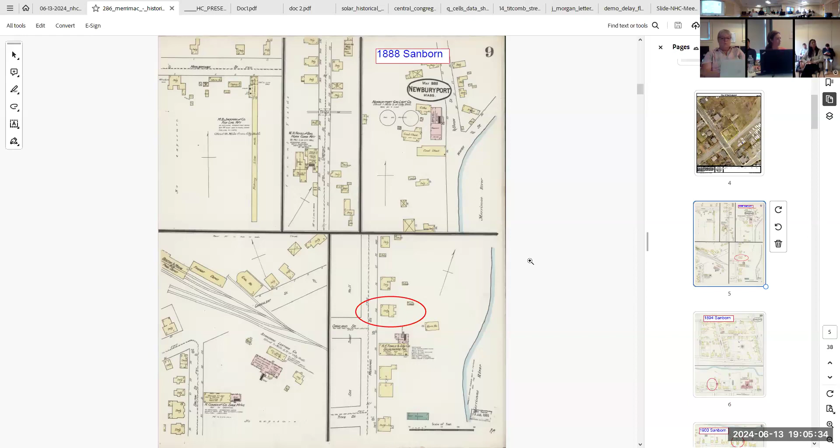Next slide please. This is the 1888 Sanborn map, and over these next slides you're going to see the rear addition change shape in various maps. You'll see the house at the bottom circled - it's got kind of two additions on the back.

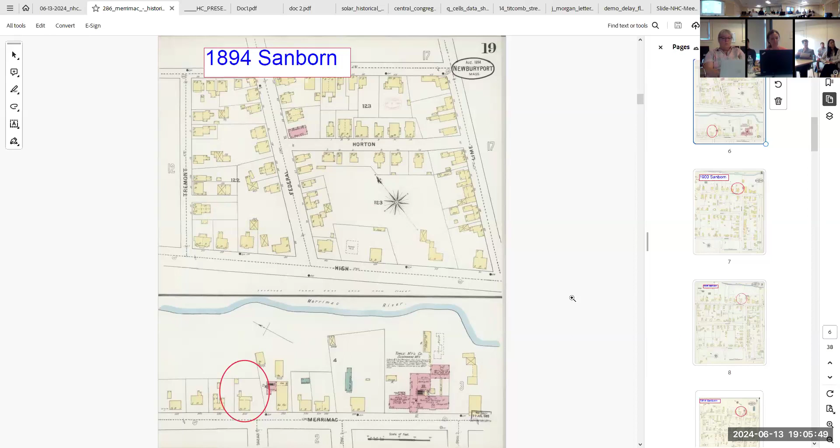Next slide please. In the 1894 Sanborn map, you can see at the bottom, it's circled, and now the two additions - there's still the shed roof, single story addition, but it's got like one doghouse addition in the back.

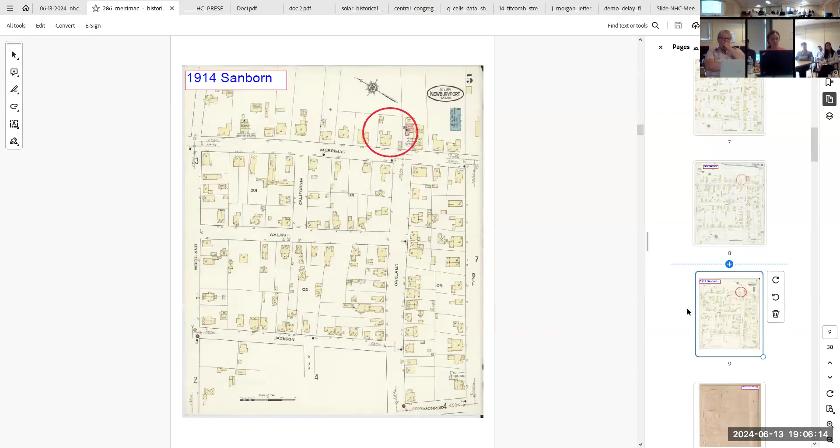Next slide please. In 1900, we're back to having two entrances in that one story addition. In 1906, it looks pretty much like it did in the prior Sanborn. Next slide, in 1914 it still continues to be the same. Next slide, and this is the 1924 Assessors map - it's back to one on the bottom.

So I think these - and we'll explain this - Lisa O'Donnell, the structural engineer, will explain in her notes. These clearly were added haphazardly. You can tell by the construction of the photos. So whether it shifted back and forth, or people took them off and added new ones, it's clear there's been changes throughout the years on those back additions.

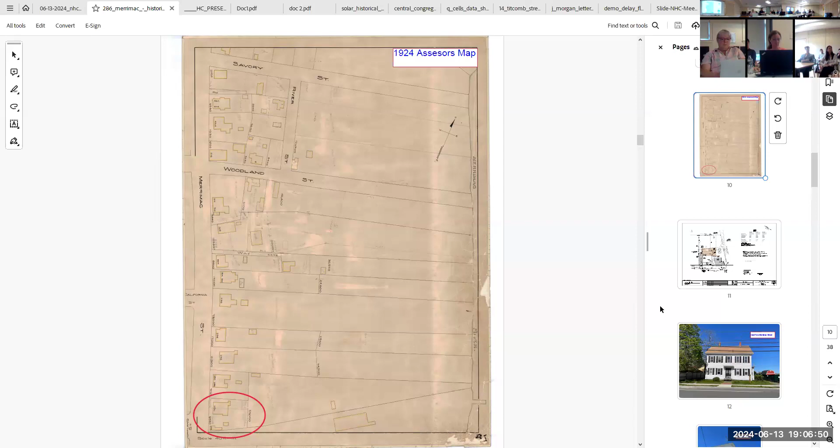Next slide please. And here's our site plan. So what you can tell - can you blow that up a little bit, Caitlin?

So the peach is our proposed addition. The existing one-story addition off the back, you can see the larger rectangle that goes across the back and wraps around the corner. We propose to remove that. And then you can see what we refer to as the doghouse additions on the back that we propose to remove as well.

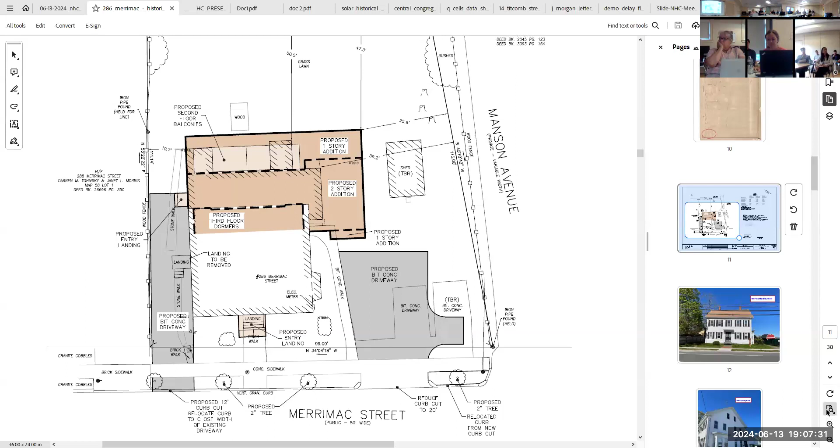Many of you were on the commission when Joel was here for the approval of his Washington Street project, which was similarly clad with all that stuff covered. If you've been by the Washington Street project, you see how nice it looks because the details have all come back out again. So a similar restoration is proposed for the main box of this house.

Next slide, please. So as I said, and what we proposed in our application, Lisa O'Donnell, the structural engineer, has looked at this. She has determined the three additions to the rear of the structure, in the fourth addition's foundation, the larger addition that runs the length and width of the structure has loose bricks and is missing mortar. The framing of the larger addition was poorly built and is in poor condition, with the frame walls sitting very close to the grade.

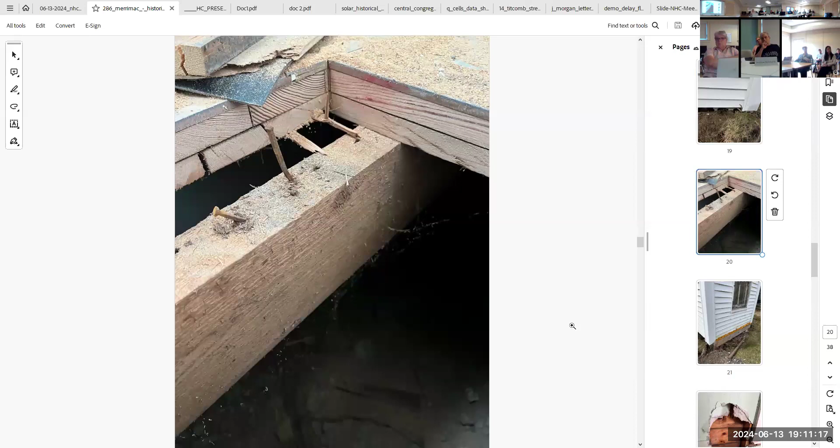Next slide, please. So here's just to show how close it is to the grade, but there's one of our cement blocks holding up that corner of the addition. Next slide. And this is just a cutaway to show that some of this is new construction anyway. Eileen, do you have anything to add to this particular slide?

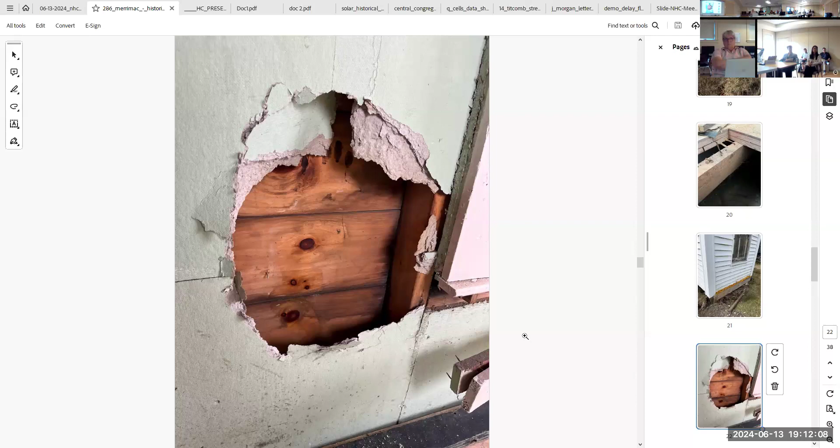Nothing other than it's pretty thin in frame, I imagine too, so really just trying to bring that up to meet code as well would be part of it.

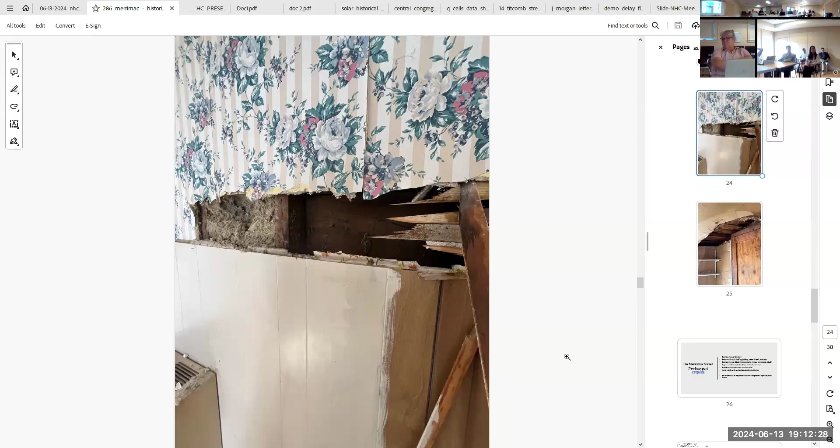Next slide, please. That's just a further view to show the construction of the building itself. Next slide, please. And the insufficient construction of the walls, and as I said, the insufficient lumber sizes. Next slide, please. And again, into the roof, and you can see how it was kind of patched.

When was this built, the additions? Well, we don't know exactly. It's old, certainly old, because it shows up on some of the 1900 plans, that addition. But the dog houses attached to it have changed over time. And even the addition appears to have been patched - you can see from the existing additions how that shed dormer is at an angle, and then it's got the house that kind of wraps around the edge. So it's kind of patched on.

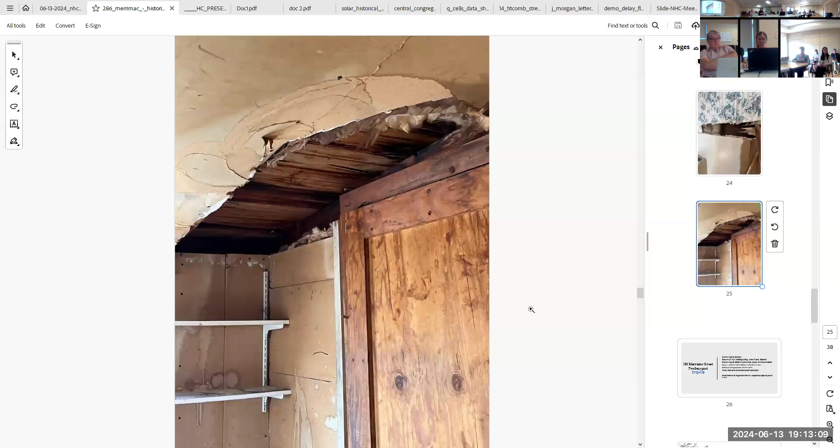Next slide, please. So the proposal, as I indicated, is to improve the current form of the structure, and to remove all vinyl cladding, the siding, corner boards, shutters, remove the original detail - restore the original detail, corner boards, expose the eave fascia details, improve the awkward shed additions on the south elevation, install period-appropriate window styles, cedar clapboards, and architectural roof shingles. And detail it in to restore the original structure to complement the adjacent period houses.

So with that, I'm going to turn it over to Eileen to describe the work that we propose. Thank you, Lisa. So actually, this...

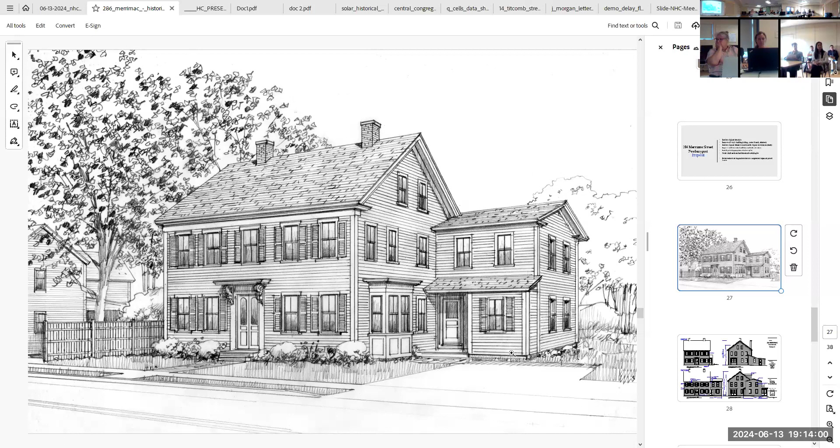This is to expand on the addition and start giving hints to where we're headed with this proposal and proposed design. But if I could just pass over that one and go to the next slide, please, just to compare existing with proposed.

So I think I'll start by talking about the changes as they relate to change in mass and form, and then I'll go back and talk about the changes in materials. So starting at the top left, the top two pictures are existing and the bottom two are proposed.

If we start with the front elevation, you can see on the bottom left drawing our addition. We have a two-story addition being proposed where you saw that sort of awkwardly shaped shed roof, one story wrapping the corner. That is the location which we're replacing with the two-story. The bottom right shows it as a side profile.

This is the elevation that faces downtown. What we're showing here is that we're proposing to come in with the two-story addition with a shallower pitch. What's important to note is that we still are trying to maintain that sort of subordinate position it has in plan by keeping it to the back of the original structure.

So if you were to compare the front elevation of the historic structure to the two-story addition that's proposed, it's set back about 22 feet from that building, from the front facade - trying to control and be respectful of the historic structure by bringing down the scale in both form and location.

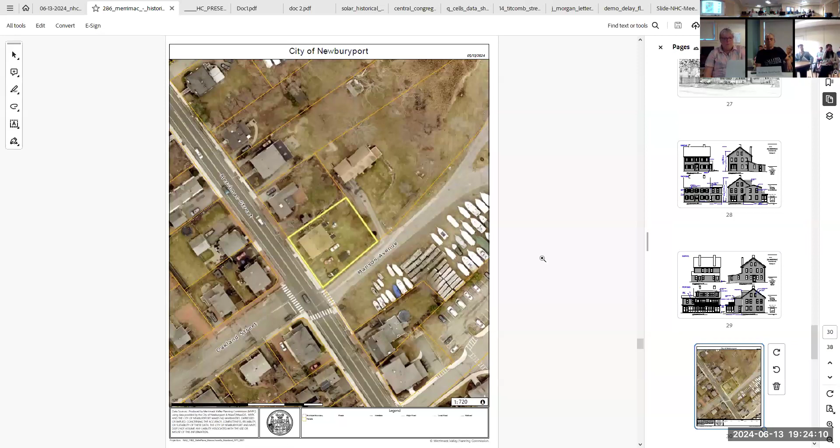Next slide, please. This is looking east on Merrimac Street, across the Mason Way to the house next door. Next slide, please. And this is looking to the rear, so you can see what's behind us. There's a small barn behind this, but it's not in this photo, it's directly behind it. Next slide, please. But here we go.

Next slide, please. This is on 253 Merrimac Street, further down. And see the dormers added there. Again, 251 and 253, so this would be to the east on the opposite side—excuse me, to the west on the opposite side.

Next, please. And 288 Merrimac, this is to the west of the property. Just from my recollection, if I'm correct, the driveway is to the right of the house, the face of the house. Right? That's correct, yep, actually. Yeah, that stays.

Well, we're proposing to actually minimize it. So it provides the parking for both units right now. We'd like to actually separate it. We're proposing a single lane drive or curb cut to the left of the building, and then take the existing curb cut and narrow it up, pulling it away from them. It's kind of a no man's land, everybody's just very wide, and people just park things all over the place in there, so I'm trying to control that and push it together.

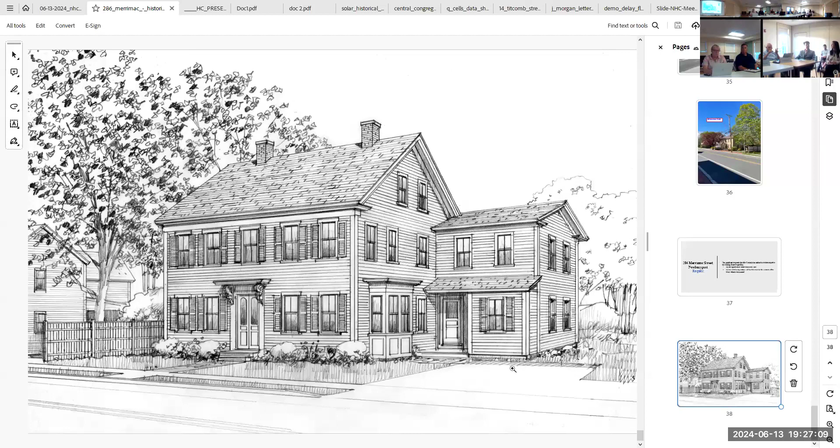Yes, I'm currently going to go to the existing plans, existing elevation. Thank you, Caitlin. So there is that primary door, the center door, and that actually—

The Zoom meeting audio seems to cut out, like just right now. I don't know if you can hear me, but...

Two-family access to the structure. So similarly, we're still going to have access to both units primarily from that front door. So internal...

It did it again. Caitlin, can you hear me? Because the audio keeps cutting out, especially it seems when Eileen is the unlucky one—her audio, when she's speaking, will just disappear to nothing.

There it is. So in the top right drawing, that's a secondary door to the left unit. And we would just, as you see on the bottom right, slide that door down. So that's, to Mark's question, you know...

Beneficiary from a usability perspective—does the proposal benefit both units equally or one unit? That was my question, yes, I'm just curious. You mean the size of the units? Well, usability, you know, when you make this change—the usability of it, is it equal between the two units, or does it favor one unit or the other? Our goal was to make them as close to equal as possible.

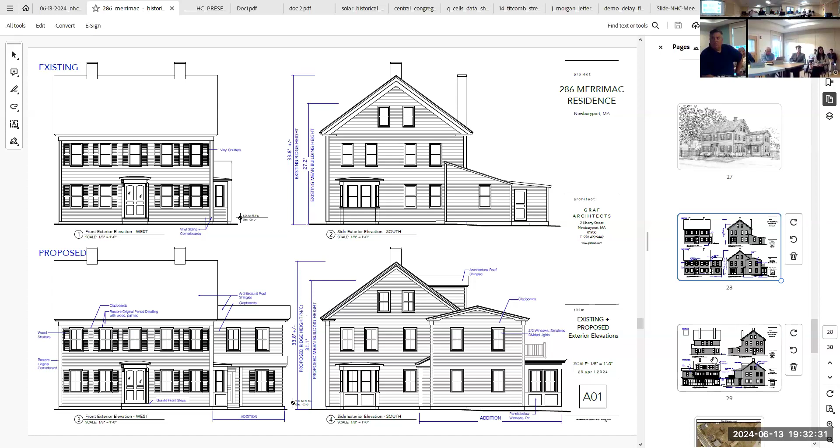You cut out a little bit there, but I think we got most of it. We need a little more detail on the way the extension on the back is going to be decorated. I see these sort of rectangles below the windows. If we could see the back elevation, what do you propose in terms of materials and decoration on that ground floor, below the windows?

Yes, so the idea there was, similar to the traditional bay that has panels below, we have that wrapping around the small section of this 10-foot addition of the one-story we're looking at. The goal was to make that—and granted, it's longer than a traditional sunroom than you'd expect to see—but as an effort to distinguish between the main bulk and body of the architecture, this area will all be paneled. There's no shingle or clapboard there; it's all trim work with a nice detail paneling system below.

This would be... not plastic, not metal. Sometimes, when you get closer to the ground, it might be more appropriate to use something like Azek—there's also Boral, but I was thinking of this one, Azek, thank you. The panels will be in the middle and just take paint.

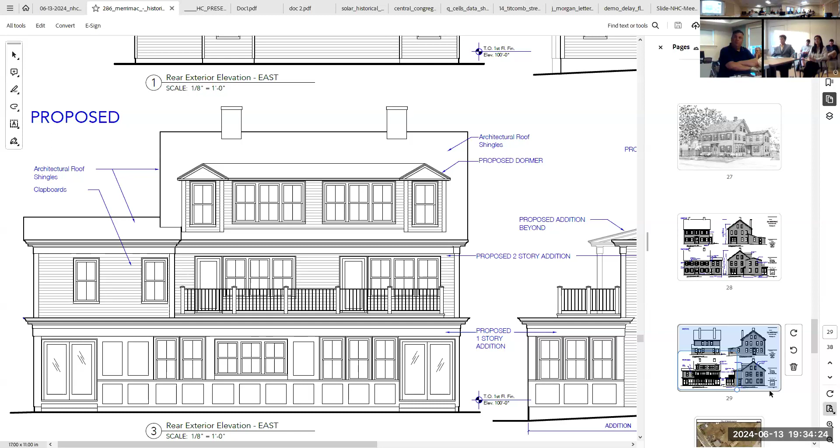Okay, any other comments? Questions? I guess a motion to approve—I guess I'll be writing this up. Does anyone want to make a motion? I make a motion to approve. Second plan, I'll second the motion. All right, we'll go around and see if everybody can hear us, voting on approving the write-up of the recommendation of the DCOD.

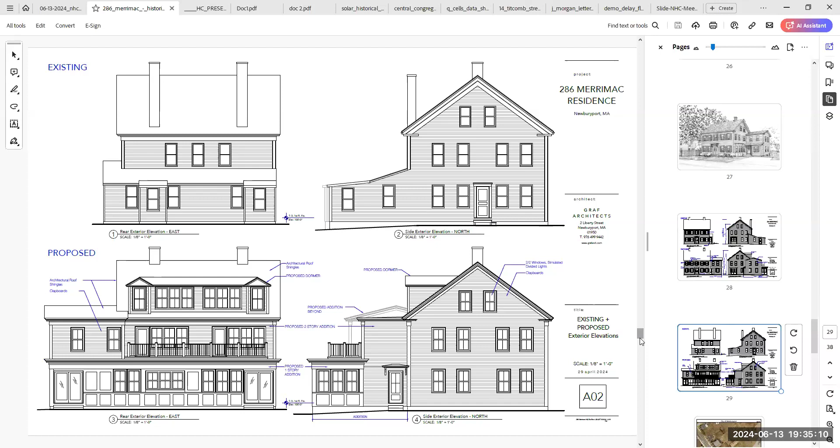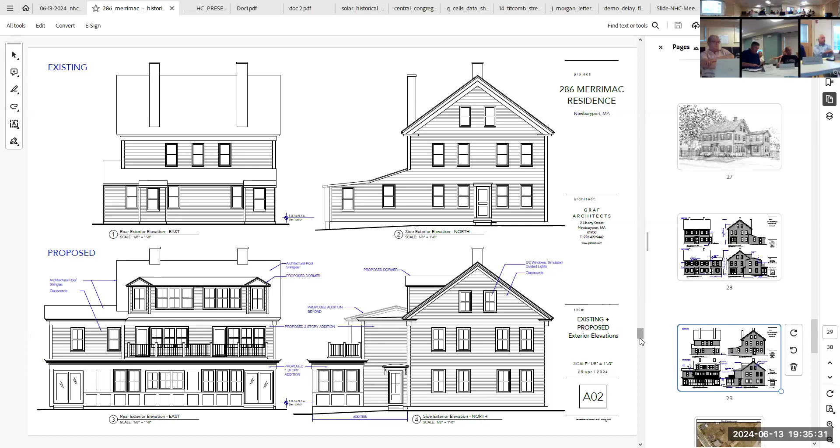We'll start with Glenn. Glenn, can you hear us? Your vote? Yep, I can hear you, and yeah, I'm a yes vote. Biff, I might have some materials that you can use to assist with that, templates and what have you, to make that job a little easier. Great, thank you. Myself, I'll vote in the affirmative. Mark Sindrome, yes. Andrew Bernhardt, yes. Ed Neumer, yes. Alan Markey, yes. Thank you. All right, it appears unanimous, and I'll be writing that up soon. Thank you very much. Thank you.

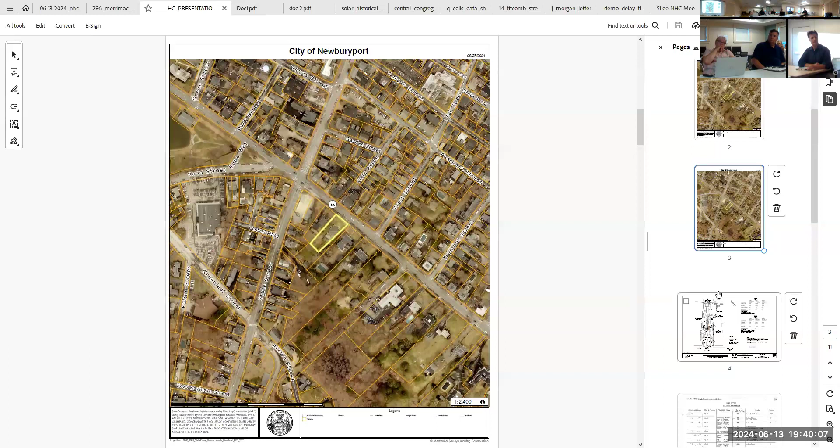On the left, the 89 section is existing, and the hatched section to the right on 91 is a mudroom and a screen porch. To the left, there's a hatched portion which is a mudroom. The mudroom on the left is about 11.5 by 8 feet. On the right, the screen porch is about 11.5 wide by 7 or 8, plus a screen porch which extends another 18 feet out toward the garden in the back.

For anyone who was on the garden tour this past weekend, this house was on the garden tour, and there's a beautiful garden which I'll get into in the back. You can see the proposed infill or addition is 3 feet more, taking the screen porch, redoing it, and pushing it about 3 feet back toward the property line.

Between the two structures, they're proposing to fill that in with a new building, and you'll see that when we get into the architecturals.

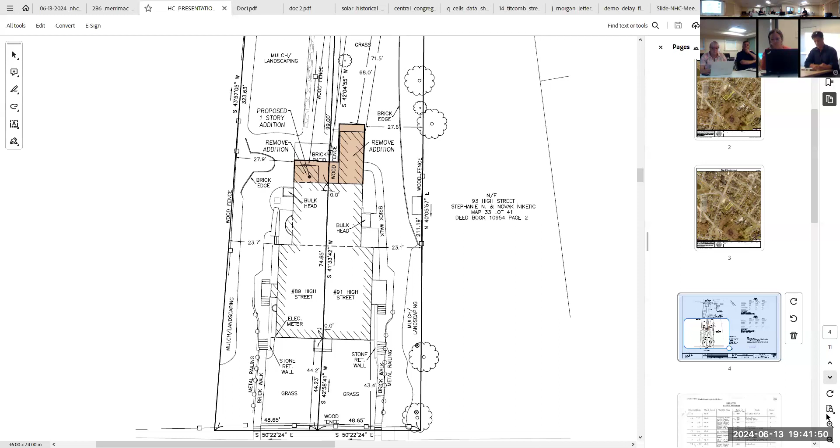Very quickly, next slide please. This is listed in the district data sheet as a Federalist from 1810, the Moulton House, and there's a nice write-up on the Moulton House which I'd be happy to go through if you haven't read it yet.

The next slide please, I'll just read very quickly. The historic name is the Joseph Moulton House, 1810, Federal style. Architectural significance: it's an excellent example of a square house built along High Street during the early years of the 19th century. This house has a 3-story hipped roof form typical of the style.

The modillion cornice is exceptional, as is the entrance portico, which is original. The portico is supported by fluted Corinthian columns, and the door itself is flanked by painted Doric pilasters. The small square windows of the 3rd story are typical of the federal homes built by Newburyport's mercantile class. So obviously, one of the great federals here in Newburyport.

None of our project touches the front or the next two-story piece. It's only the back where we're proposing to make some changes.

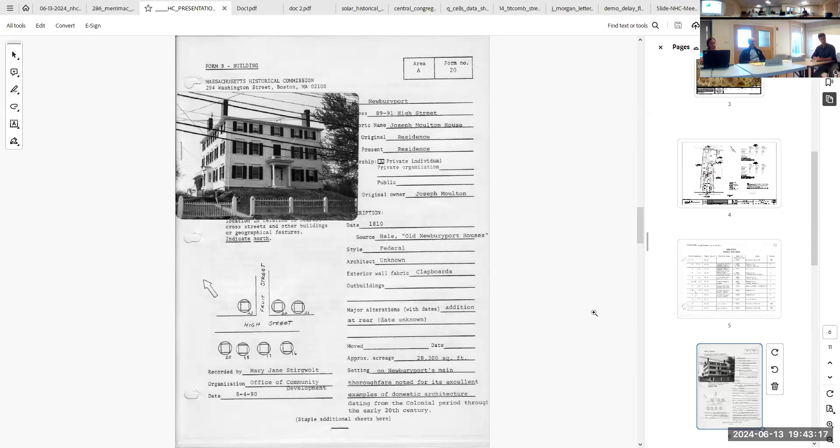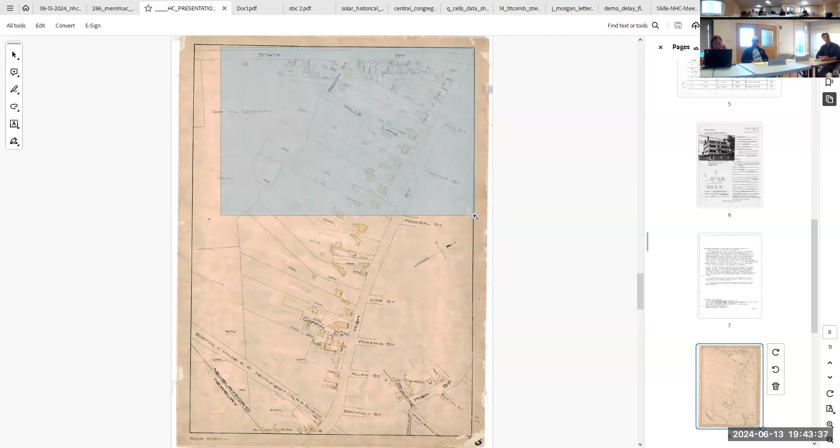Very quickly, from the 1924 map, if you can zoom in on 89-91 toward the top right, you can see it up there. The house in 1924 had what appears to be two mudrooms. There's one to the left, which we see today. The other one had no screen porch at that time, so that must have been added after 1924. But the two smaller one-story mudrooms did exist at that time.

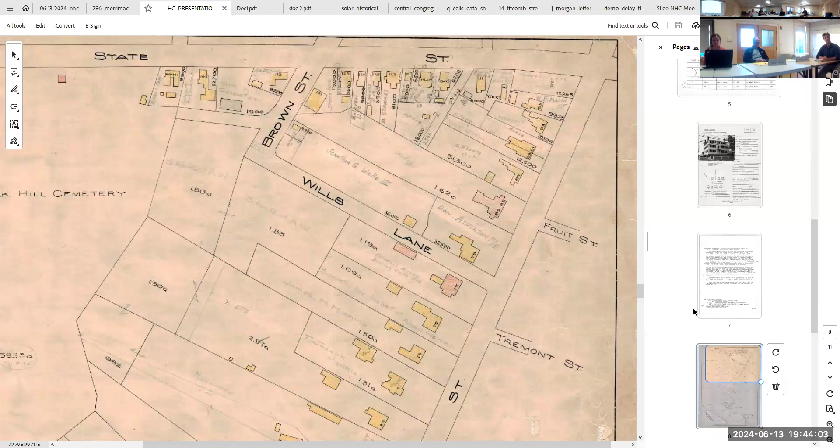When were those additions built, just out of curiosity? I don't have a date on them, but certainly before 1924 - they were in that 1924 map.

So what we're proposing to do is take some of the most valuable things we like, the windows themselves, which are original and beautiful, from that back addition and repurpose and reuse them in the new addition. Even the door for that 89 mudroom will be reused. So what they're hoping to achieve is an addition that is well insulated and well built.

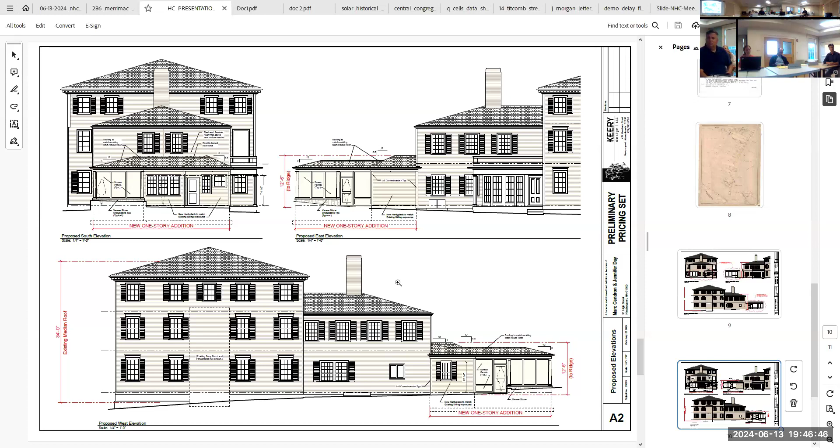The triple window in the middle that you see, the plan is to use the original windows - we have one from the basement and we're taking two from the renovation we're doing. On the right side upper drawing, we're seeing basically the same hip roof form of the new structure, but with a proper foundation and proper insulation. The bottom drawing shows, from the 91 side, that mudroom and a new screen porch.

A few features that are slightly different, which we think are nice improvements on the screen porch: it's kind of a block wall that's seen better days, and we're going to be using a concrete foundation but with a nice thin stone veneer and a couple of columns.

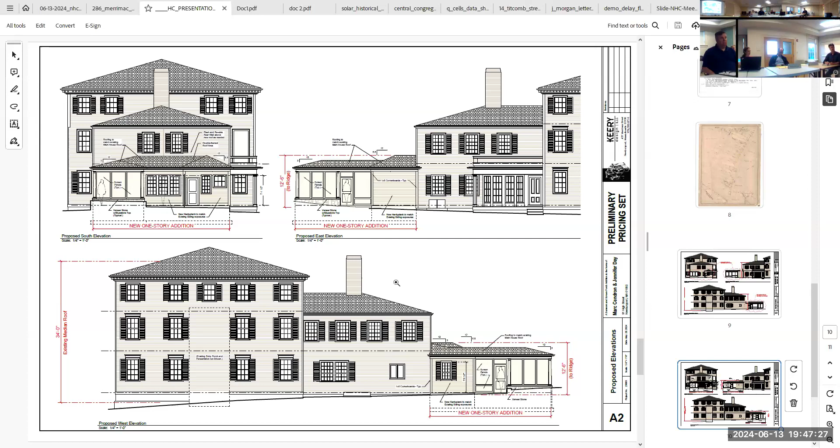This is a view from the rear, showing the existing screen porch, which actually has a gable on the 91 side. We propose a hip roof, which will look a little nicer, and some columns similar to this. On the 91 side there are some Doric columns on plinths, and I think these will be a nod to that, tying the screen porch in a little more nicely. I think it's just a little more elegant and will look nicer.

If you zoom in a little on this sketch, essentially we're just bumping out a little further with the screen porch, and we've got almost a replication of what were the original features of the 89 mudroom. The windows in the middle again are the original 9/6 windows that were present in the old house, which we reused.

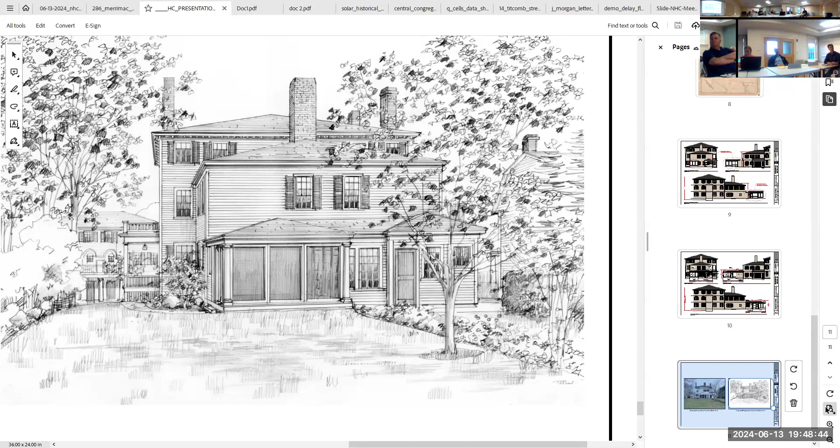With that, I think we're set. Okay, thank you. I'll open up to the board first. Anyone have any comments, questions?

We have access on State Street. It's lovely in the summertime and the spring and the fall. In the winter time it gets to be a little different. You have to invite us back over.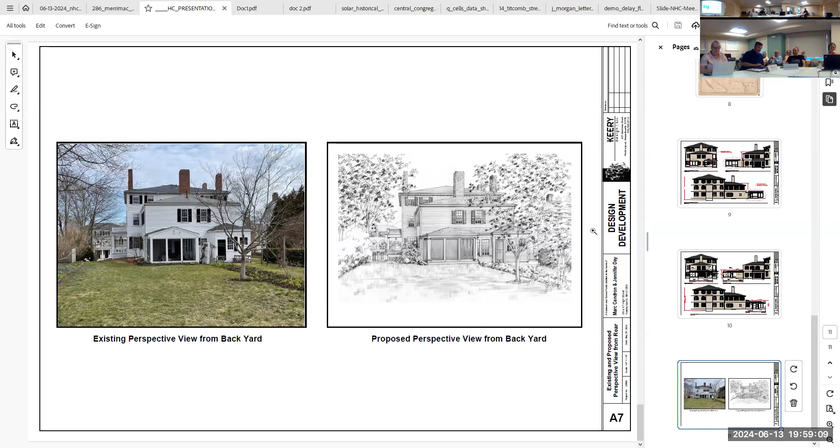Let's do this one more time. I make a motion to lift the demo delay and approve the plans on 91. Second? Second, thank you. All right, one more time, Glenn, what do you say? Yes. Okay, I want to see about the trend here. Yes, Andrew, thank you. Yes. And Ed, thank you. And last but not least, Alan.

Yes. All right, I think we've gone through all of the motions, so to speak, and the demolition delay is lifted. Plans have been approved. Thank you very much. Apologies for making it so. Yeah, I feel in, I'm sure. We are twice as grateful that you... Well, it still was better than going through two full different plans, right? Right, that's true.

All right, well, it looks like we're moving on to general business. And hear from the Central Congregational Church at 14 Titcomb. We have one address, maybe. Do it. If you'd like to give your name and address for the record and proceed.

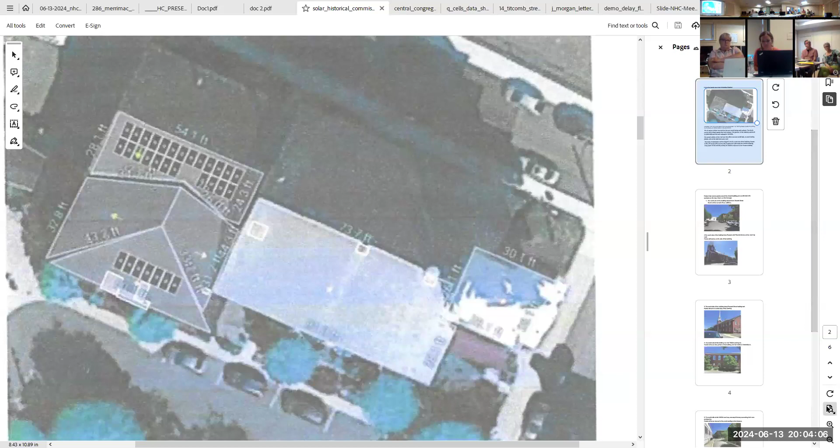roofs. There will be an optional snow guard, which we are choosing to do, that would be installed along the triangular piece, because there is a sidewalk that goes along the side of the building from Titcomb Street moving along, and that would prevent any snow sliding off of them, although probably wouldn't because it's not much of a slant. But the snow guard would be installed.

These are some of the pictures of what you would not see probably. And this is the view from Pleasant Street, a little bit further down the street from Changing Tides Coffee Shop, looking to the east. That's the rear corner. There would not be panels on that side, the Pleasant Street side.

And could we go back, please, Caitlin? Thank you. The second picture at the bottom there is the view looking west, street, corner of Pleasant and Titcomb Streets. The panel would not be on that side. Next one, please.

And the bottom picture there, number 4, is the view from the YWCA parking lot, the lot that many people think belongs to Central Church. As you face the sanctuary that faces Titcomb Street, there's a parking lot to the left. It belongs to the YWCA, not the church's. We have a garden, and then the additions bump out a little bit, almost immediately at the YWCA property.

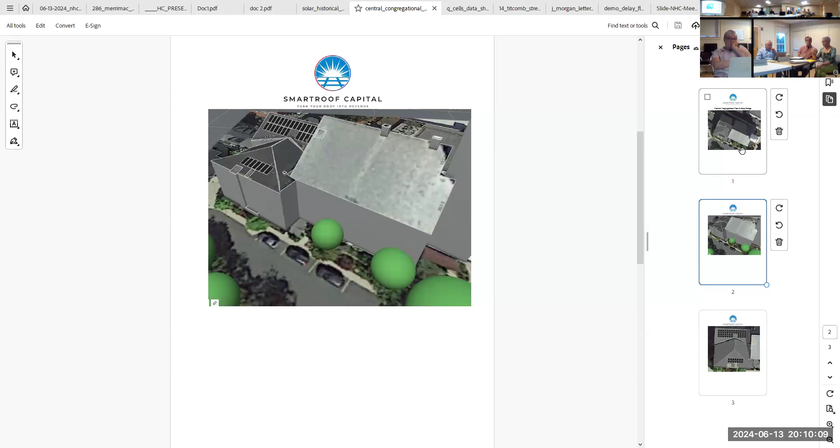How many panels are you actually installing? May have missed it. I think it's 31.

And you mentioned that they're flush mounted. Yes. Almost every installation I've seen is flush but raised slightly. Are these really fully the same level as the roof, or are they lifted a couple inches? Well, they have a thickness to them, so there's some space between the roof and the panels, but they are not propped up additionally. From the way it was explained to us, the angle of the roof is appropriate to get extra benefit, so they're not tilted, like one end of the installation isn't taller than the other. I know what you mean, if there's brackets or something. Yeah, generally it's got to be mounted. Yes, it is mounted, right.

Other questions? How long does it take them to do the job? About 1 week. And they said they could start mid-August.

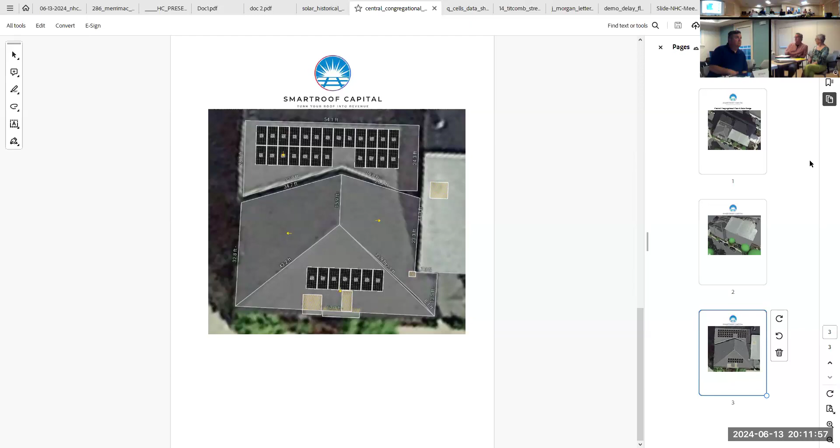We've already had a member of the church inquire to speak to the same company about getting this done. We're hoping that, since it was a congregational vote, the decision to go ahead and confirm and carry on with it. Yeah, and it was a unanimous vote, no questions asked. I've been in touch with John and Ian so we can coordinate and not disrupt anything they're going to be doing during the construction period, and to have the support of this.

Okay. Mr. Chair or Vice Chair, this is Glenn. Can you hear me okay? Yes. Yeah, I just wanted to make a quick comment.

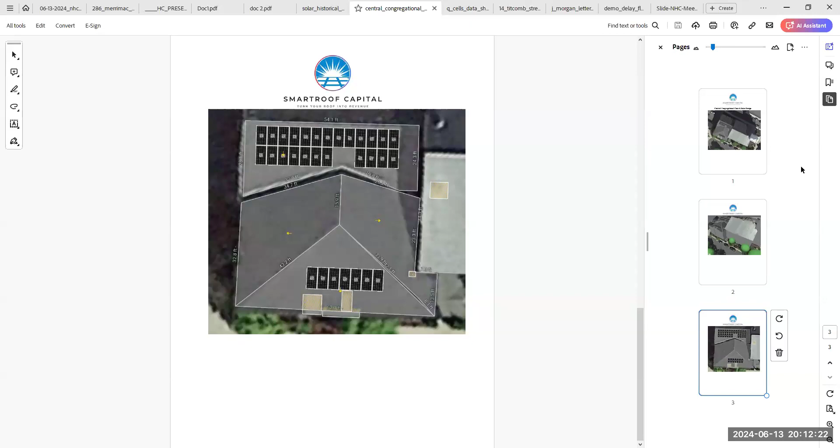A while back I was invited to take a look at this, I believe it was with Ms. Moore, to discuss whether they would need to come before the commission. So we took a walk around a lot of those same spots where these photos were taken. It's funny, I knew solar panels were going to come up eventually, and I was sort of dreading it in a way, but this one I'm glad is relatively easy, because what you've been hearing is quite true. It's very difficult to see the roof until you're way up that little narrow street behind the swimming pool of the Y, to the lower left of this picture. You have to walk quite a ways up before you can even see the roof, so if the panels are anywhere near flat, it's going to be very unobtrusive.

So in my opinion, this would not be something that we couldn't allow despite the preservation restriction.

Okay, thank you. Although we should ask about reversibility, I just thought of that. Did the contractor say anything about reversibility, for whatever reason, but let's say some years down the road when the panels are no longer functional, can they be removed without damage to the structure?

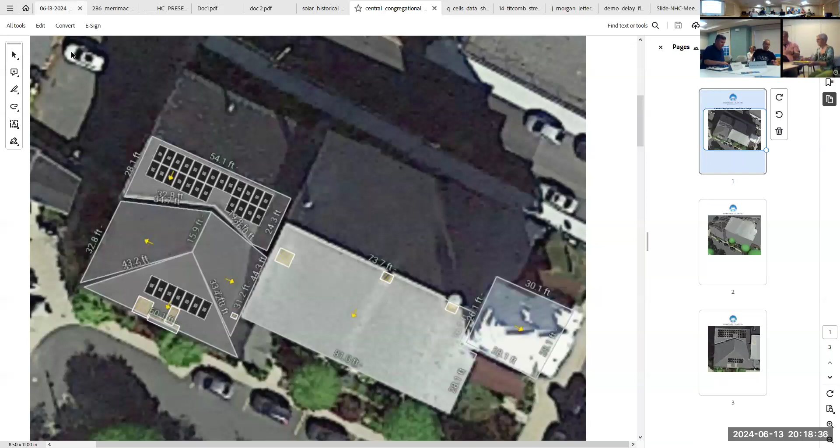Basically, the official National Register of Historic Places listing for the Superior Courthouse and the Bartlett Mall around it makes no mention of the importance of the landscape architecture of the property and the original landscape architect, which I would say is a pretty big part of its historical importance, and it's surprising that it was left out of those original documents.

So his letter is basically making the point that we should make those changes to that.

I don't believe we're voting on any of this right now. Right, so it really just, I guess, if we have any questions or discussion around it, we can do that now. I thought about whether anybody wanted to make a public comment, but since we're not voting, I'm not sure if that's necessarily appropriate.